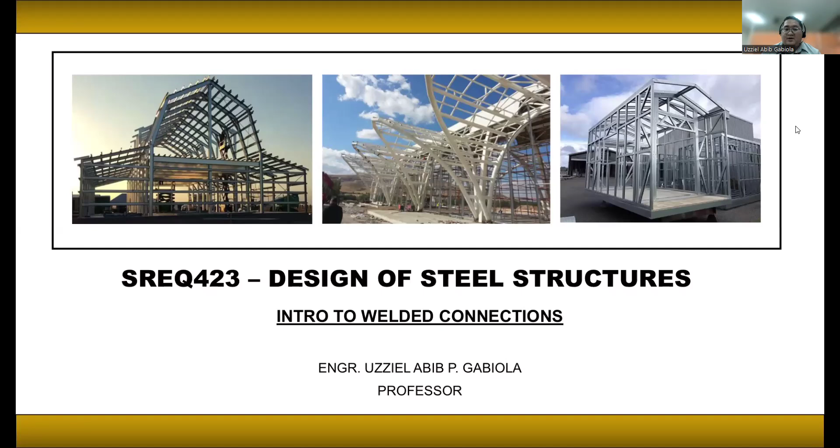So to start, let us define what we call welding. I hope everyone is already familiar with what welding is. When we talk about welding, it is a fabrication process whose goal is to join materials, specifically our structural steel sections that are made up of metals, by causing fusion. Welding of a structural steel section allows the creation of a strong and durable structure.

Sometimes we have sections that cannot be fabricated or are not available in standard shapes, or we want to stiffen a beam. We want to put cross bracings along its length so that, for example, its lateral torsional buckling can be controlled or reduced. So we try to stiffen those elements by introducing plates into our section, and one way of connecting these plates to the beam is through welding.

Structural steel sections are commonly welded together to form beams, for example built-up sections, columns, trusses, and other load-bearing elements in buildings, bridges, and various infrastructure projects.

In general, when we talk about structural applications, there are 4 welding methods that we need to understand. But for our case, there's really only one that is mostly used for analysis, which is the first one, shielded metal arc welding (SMAW). We also have gas metal arc welding (GMAW), flux cored arc welding (FCAW), and submerged arc welding (SAW).

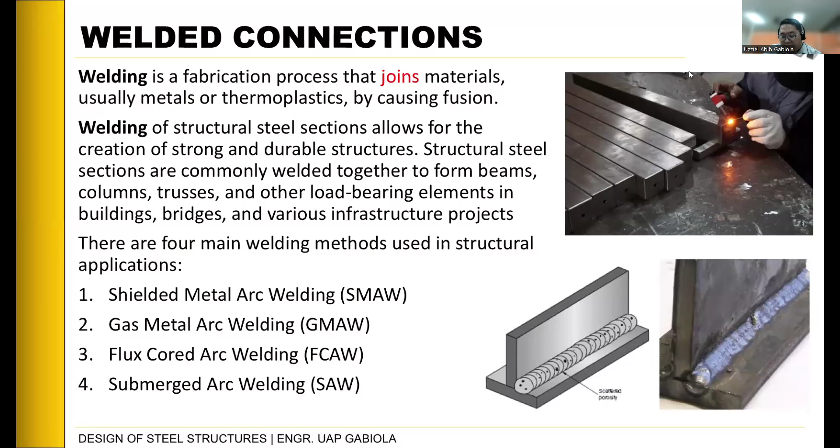So let us differentiate these 4 welding methods. First, we have shielded metal arc welding. This is the most common type of welding we see even in small or residential projects. That's why shielded metal arc welding, SMAW, is sometimes called stick welding.

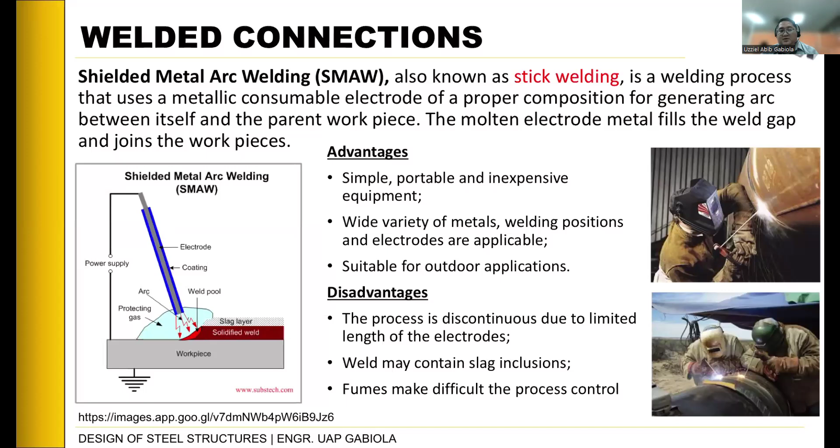Then next we have yung tinatawag nating gas metal arc welding or yung GMAW, o minsan tinatawag na MIG welding o metal inert gas welding. So for this type of welding process, may arc welding process tayo in which yung weld is shielded by an external gas. Yung external gas na yun may be argon, helium, carbon dioxide, or a combination of argon and oxygen, or other gas mixture.

So papansin niyo meron siyang, hindi siya nakastick, meron na siyang nozzle na kasama, and then dinadirect mo yung application ng electrode mo dun sa gusto mong i-connect na material. So halimbawa, dito sa portion na to, ito yung wineweld niyang part. So directed niyang ilalagay yung portion na may nozzle, yung may copper nozzle, dun sa kung saan niya gusto ipadaanin yung mismong electrode wire na nandun sa loob ng nozzle natin.

Okay, so meron siyang continuous wire, kaya mahaba yung nito, yung supply. So unlike sa stick welding, mas continuous yung welding natin. Kasi dun sa welding gun natin, may continuous wire being fed to it, and then yung molten metal is protected from the atmosphere by the gas na na-form.

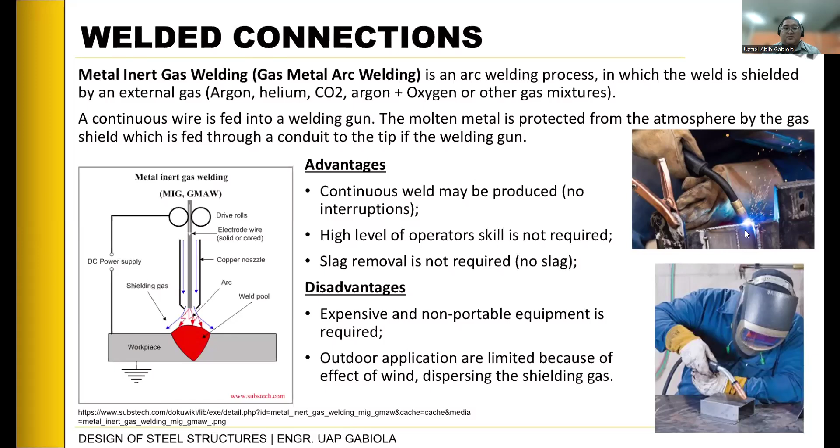It's very prone to having the gas disperse once it's exposed to wind. That's one of the challenges when using Metal Inert Gas welding or GMAW.

Next, the third one is Flux Cored Arc Welding, or FCAW. It's similar to GMAW, having a continuous wire fed into the welding gun. The difference is that the filler wire has a core.

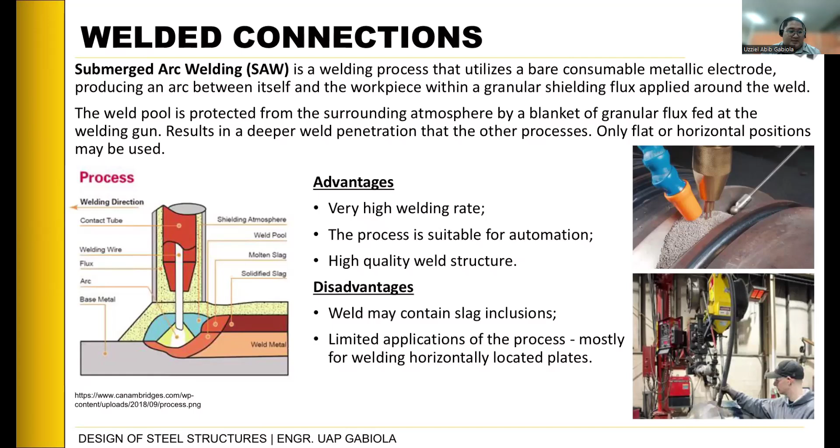Next, after these processes, we also have different types of welding. Earlier we covered methods of welding; now, types of welding.

So in structural engineering applications, we have various types of welds used to join structural components to create a strong and durable structure. We have 4 types of welds. I'm sure there are other types, but these are the most common ones used.

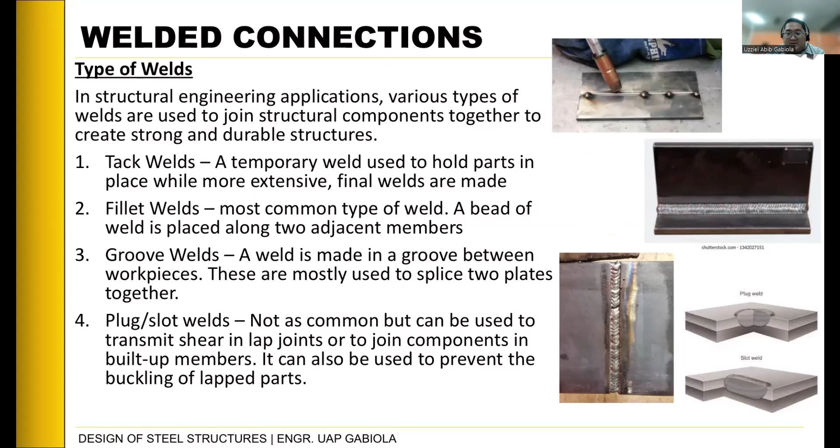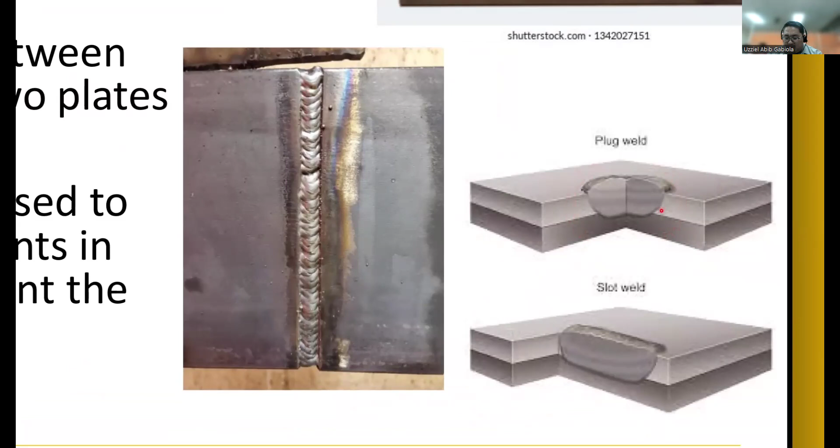Then we have plug or slot welds. These aren't very common, but can be used to transmit shear in lap joints. For example, if we intend to increase the thickness of a plate, what can be done is a plug weld or slot weld. So it's not commonly used - I couldn't even find much example application of plug and slot welds. But again, for our case, tack welds or fillet welds are what we'll use.

After that, we have the different welding joints, or welded joints. When we say joints, it refers to the location where two or more pieces of metal are joined together. There are different types of welded joints used depending on the configuration.

Let's discuss them one by one. The first one is the butt joint. With a butt joint, we have two pieces of metal, we align them, and weld them together along their adjoining edges. For example, we have two plates - these are the edges of our plates. When we weld them, we join the edges together. When you put the two edges together and then apply weld, that is a butt joint.

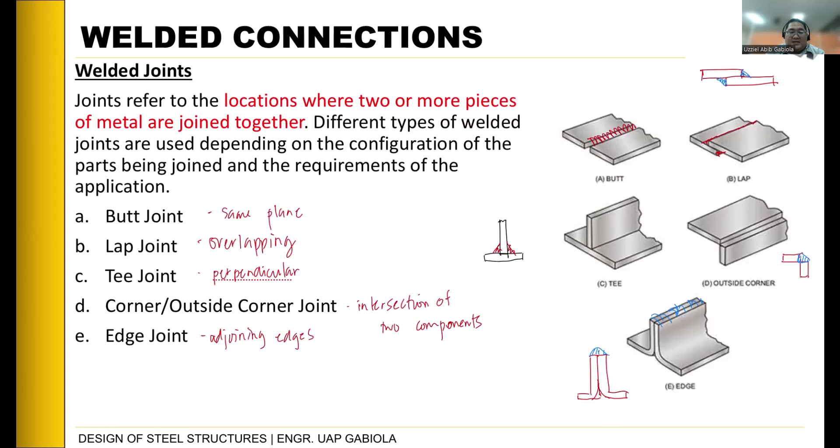For fillet welds, the symbol is a triangular shape. Every time we have a weld, we point to it with an arrow. So we point to that weld and then we put in the specification - whatever the properties of our weld are.

So kapag may nakita tayong triangle doon sa arrow line natin, ibig sabihin fillet welds yung ating ginagamit. Katulad nito, halimbawa may welding tayo dito, tinuro natin yung welding, naglagay tayo ng triangular dito.

Ibig sabihin fillet welds itong in-apply niya dito, welding type. Ano ibig sabihin kapag nasa ilalim o nasa taas yung mismong triangle natin? Kapag nasa ilalim yung triangle, ibig sabihin nandun sa arrow side yung mismong weld natin. Kung saan nakaturo yung arrow, nandun yung welding. Titingnan niyo, dito nakaturo yung arrow pero yung triangle niya nandun sa kabila. Ibig sabihin other side yung may welding, kaya ito yung may welding na side sa kanya.

Kung halimbawa both side ng workpiece natin ay may welding, ang gagawin natin, yung baba at yung taas, lalagyan mo ng triangle para i-indicate na both side, yung this side na may arrow and then the other side of the arrow, meron siyang parehas na welding. So ganun lang kasimple yung symbol natin for fillet welds.

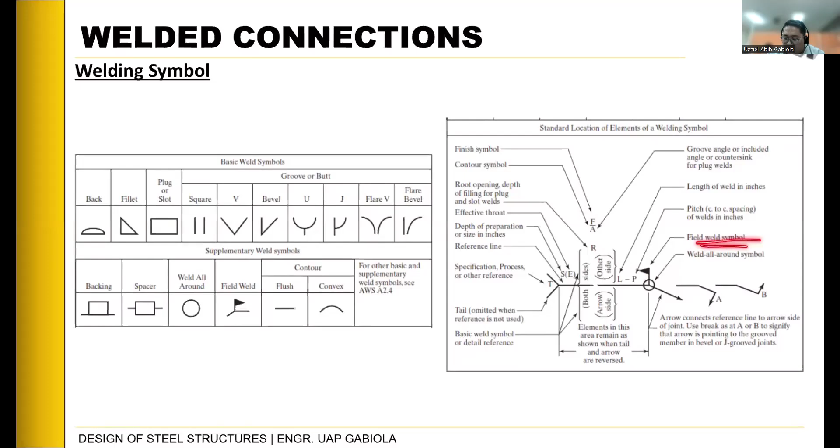Yung mismong ano to, 1/4 inch fillet weld on both sides and 6 inches long, as well same on both sides - not necessary but permissible to give sizes on both sides of line. The flag indicates kailangan na field weld dapat siya, dapat on-site siya gagawin yung welding na yan.

Halimbawa ito, staggered intermittent 3/8 inch fillet weld, 2 inches long, both sides. Parang katulad nitong nandito, nilagay lang niya na both side. Tapos kapag halimbawa may bilog yung arrow natin, it means all around ng joint symbol. Lalagyan natin - kahit hindi mo nilagyan ng ganito, lagyan mo lang ng all around doon, ibig sabihin may weld ka all around.

Pag merong tail, may specific requirement o specification na ginagamit. Pero basically ito lang yung gagamitin natin for our problems: may nakaturong arrow and then may fillet welds, merong thickness, merong length. Yun lang kasi simple connections lang pinag-uusapan natin.

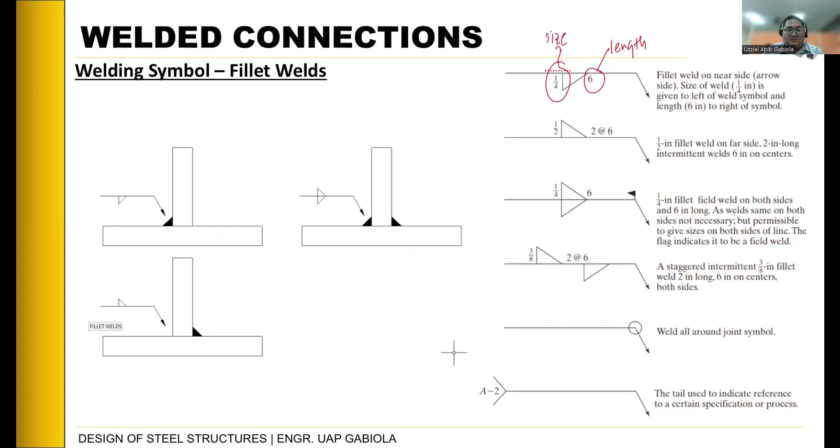And when dealing with other type of connections o yung more complicated connections, it will require a different or more extensive discussion, hindi lang yung ganitong one topic lang. Parang one course talaga siya para maintindihan.

Ngayon, since na-establish natin na fillet welds lang yung gagamitin natin, let us now determine how we will be considering yung capacity ng fillet welds na nakalagay sa atin. Yung capacity ng fillet welds is defined based doon sa tinatawag natin effective throat thickness niya ng weld natin. So ano daw yung effective throat thickness? That is the distance from the root of the weld to the face of the weld.

Halimbawa meron tayong weld, ito yung weld natin. So from the root - ang root niya yung nandun sa pinakadulo, yung sa mismong intersection ng workpieces natin. Yung distance niya papunta doon sa mismong weld natin, yun yung throat. Pero since ang kailangan natin is yung effective lang, ang ina-assume ni code is may theoretical throat tayong ginagamit. Ang ginagawa, kinukuha natin yung 45 degrees nito. Naka 45 degrees to, itong distance na to, ito yung effective throat natin na T sub E.

Kaya mapapansin niyo dito, kapag ganito naman, ito convex yung type ng weld natin - convex o palubo. Ito yung concave. And then this letter C is parang kaparehas lang ng convex. Tama ba? Concave, convex, baliktad, parang baliktad.

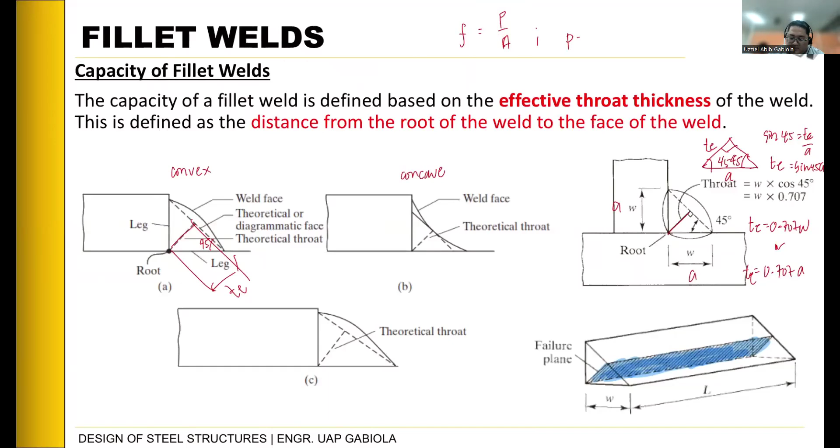So if that's our area, this becomes the base of our resistance according to the code. This is our P in our formula from before. So what is our P? Of course, our P will be equal to F times our A. So what is F times area?

According to the code, the AISC: the design strength and allowable strength of welded joints shall be the lower value of the base material strength determined according to the limit state of tensile rupture or shear rupture, and weld metal strength determined according to the limit state of rupture as follows.

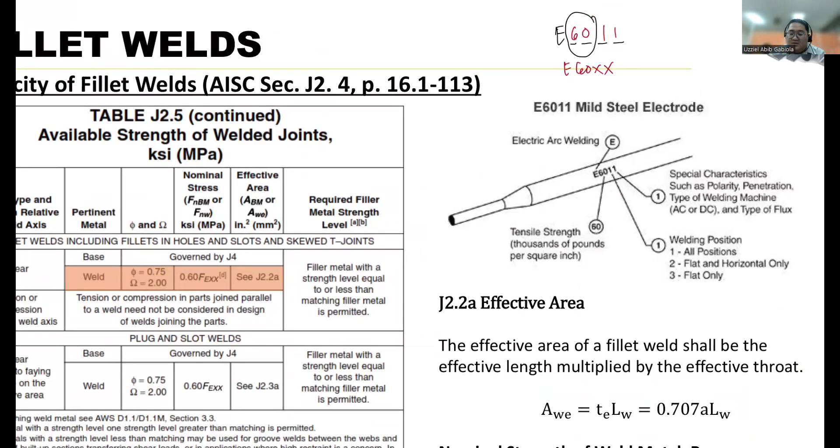Itong condition na ito is for the mechanical part, dun sa mga welders na talagang checking. Hindi na natin kailangan yun. Ang kailangan lang natin is to determine yung strength. Pwede siyang maging 60, 70, 80, 90, and so on and so forth. So kaya dapat, ano yan?

Para makuha yung nominal stress, i-multiply lang natin ng 60% yung value nung stress nung mismong electrode natin. Dito, ang ating electrode ay 60 KSI. Ibig sabihin, 0.6 ng 60. Okay, or 70, 80.

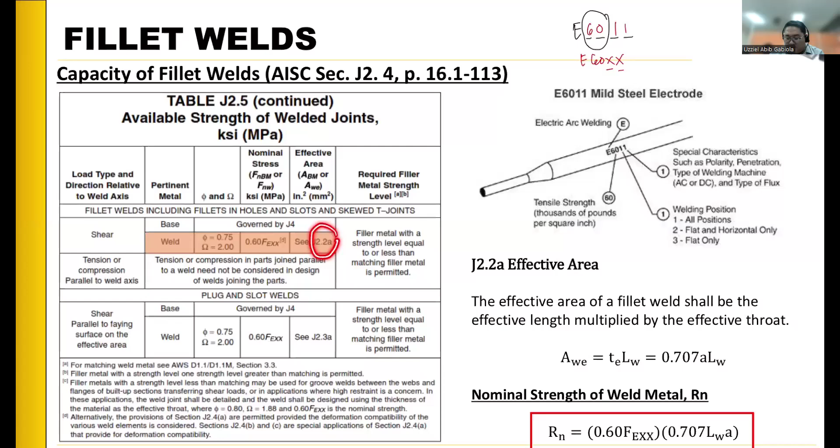Para sa effective area o yung ABM o AWE, sabi ng code J2.2A, ito na lang po nilagay ko dito. Ang sabi ng code J2.2A, the effective area ng fillet weld shall be the effective length multiplied by the effective throat. So from our previous discussion, na-determine natin na ang effective throat, ang thickness natin, ay 0.707A, at saka yung length ng weld natin.

Yun ang magiging area ng weld natin. Para makuha yung resistance ng weld metal natin, that is yung Fnw times yung area natin. Ito yung mismong value natin for Rn pag kinalculate natin. That is for the weld metal. Again, we need to satisfy weld metal tsaka base metal. Ito pa lang po yung nakukuha natin, yung sa weld metal pa lang. Ito yung formula niya. Next is yung sa base metal naman tayo.

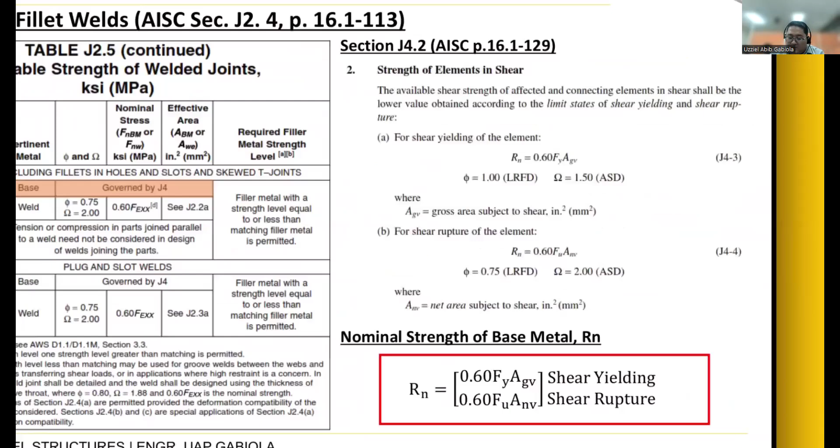Pag tiningnan yung J2.5, yung sa base metal niya, governed siya by Section J4 ng AISC. Sabi ng Section J4 ng AISC, ito po yun. Kinuha ko na lang yung element in shear kasi, as I've said, for fillet welds, shear yung mag-govern sa ating loading. The available shear strength of affected connecting elements in shear shall be the lower value obtained according to the limits of shear yielding or shear rupture. Yung formula niya, 0.6 FY AGV para sa yielding, and 0.6 FU ANV. Makikita dito nagbabago yung factor niya kung yielding and rupture yung ating kinakalculate. Kaya hindi natin pwedeng pagsamahin siya as one.

Dito, yung value ng Agv at Anv, iba, sabi natin, kapag welding naman, since wala naman tayong binubutas na plate o hindi natin kailangan magbutas, yung net area natin will be equivalent dun sa mismong gross area natin. Dito, magbabago lang talaga yung factors. Dapat alamin lang natin na pag yielding tayo, 1 and 1.5. Kapag rupture, that is 0.75 and 2. At yun ang magiging strength ng base metal natin.

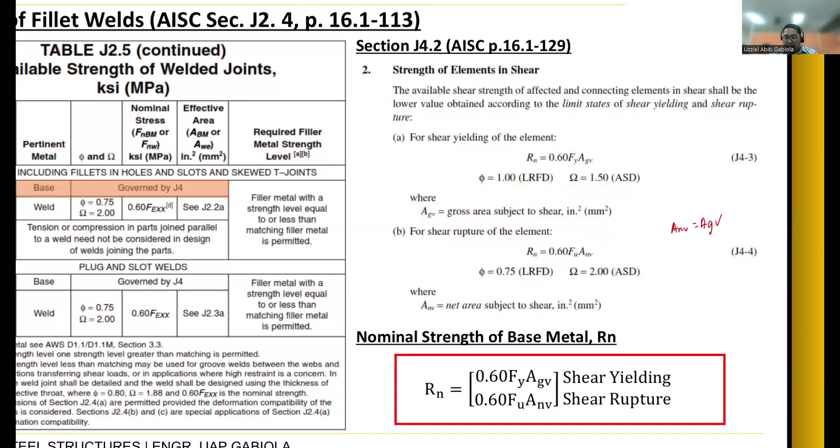Kapag meron na tayong strength ng base metal, i-compare it with the strength of the weld metal, and then look for the lowest value, that will be the capacity of our weld connection. Yun na agad yung weld connection natin. Yun na agad yung analysis. After non, na-identify mo na yung capacity ng weld connection mo.

Kung meron na tayong capacity, katulad nung sa bolt connection, kailangan din natin i-check kung na-satisfy na natin yung mga limitations ng weld natin. Meron siyang mga minimum and maximum sizes, so madali lang din siyang i-check. For the minimum weld sizes, titingnan natin siya sa table. Kailangan ma-check yung minimum weld size para daw maiwasan yung heat sink effect.

Kasi kapag nagwe-weld tayo, may heat tayong tina-transfer dun sa mismong workpieces natin. At kapag yung weld ay too small, yung plate will absorb the heat too rapidly, mabilis niyang i-absorb, na nagre-resulta sa cooling ng weld. Ibig sabihin, tumitigas agad siya kahit hindi pa natin na-form yung required na thickness para dun sa welding natin.

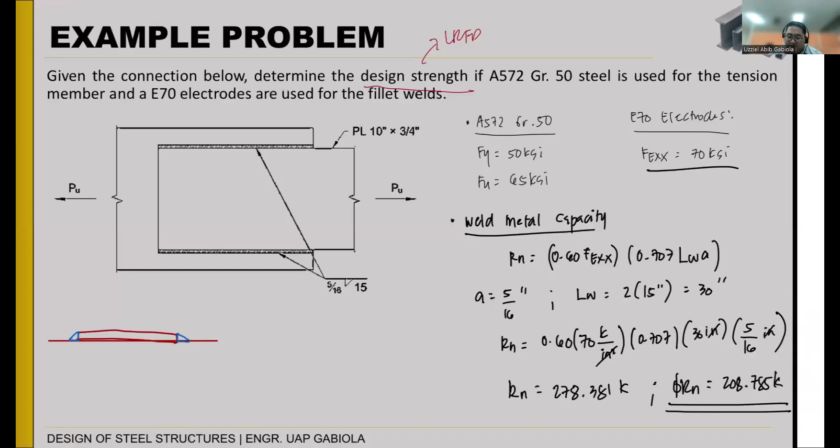Base metal capacity. For base metal capacity, meron tayong dalawa na kino-consider, yung ating shear yielding and shear rupture. Okay, for shear yielding,

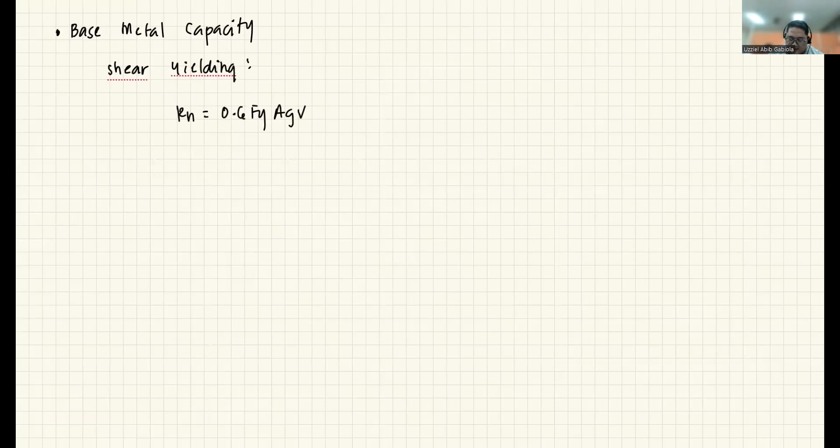Kailangan natin, Rn is equals to 0.6 Fy AGV. Okay, so ano yung AGV natin? Ano ba yung kino-consider natin na kapag yung base metal natin, alin ba yung thickness na exposed dun sa welding natin. So syempre, dito sa diagram natin, ito 'yon, and ito yung thickness na 'yan. Itong portion na to, pag sinide view natin, ito yung thickness na 'yan, and that is how much?

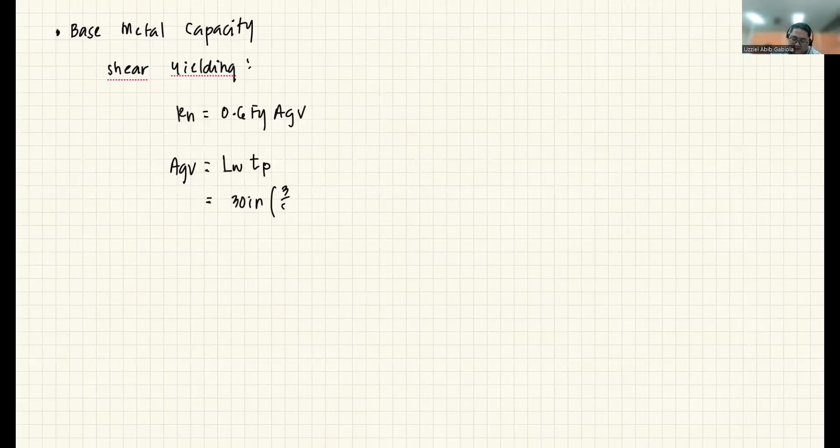That is 3/4 times yung length ng weld natin. So, AGV will be equals to length ng weld times yung thickness ng plate natin. So, that is equals to 30 inches, and according dito, that is 3/4 inch. So, ang AGV natin will be equals to 30 times 0.75, that is 22.5 inches squared.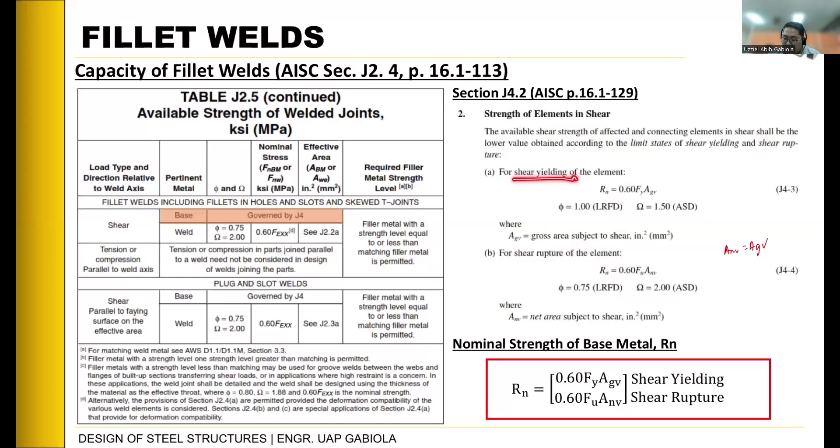That is AGV. So, ang Rn natin will be equals to 0.6. Ang Fy natin will be 50 kasi yung material ang pinag-uusapan natin, times 22.5 inches squared. So, Rn natin is 0.6 times 50 times 22.5. That is 675 kips. And for shear yielding, ang phi natin is 1.0 for LRFD. Ibig sabihin, that will be the same value na 675 kips. That is for shear yielding.

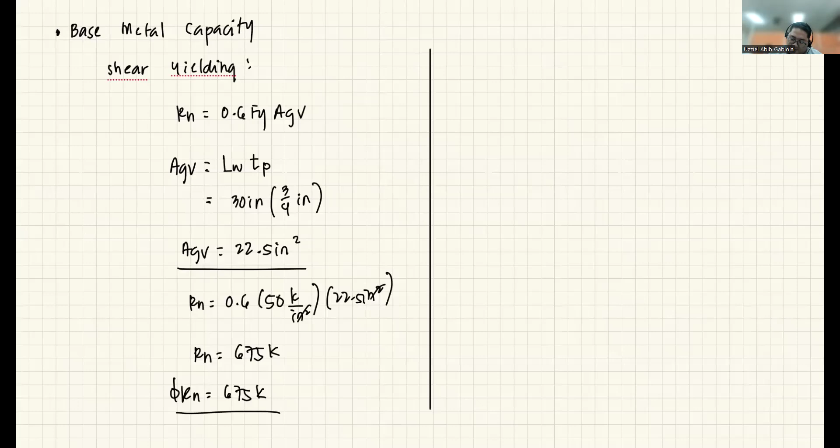For shear rupture, the formula is Rn equals 0.6 Fu Anv. Pero again, as mentioned, for welding, Anv is equals sa AGV. So this is 0.6 times 65 kip per inches squared times 22.5 inches squared.

Cancel natin yung inches squared. So Rn, 0.6 times 65 times 22.5, that is 877.5 kips. So ang phi Rn natin, this is for rupture, so 0.75 times 877.5 kips, phi Rn is equals to 658.125 kips. Okay, so comparing all yung capacity na kuha natin, so ito yung para sa shear rupture ng base

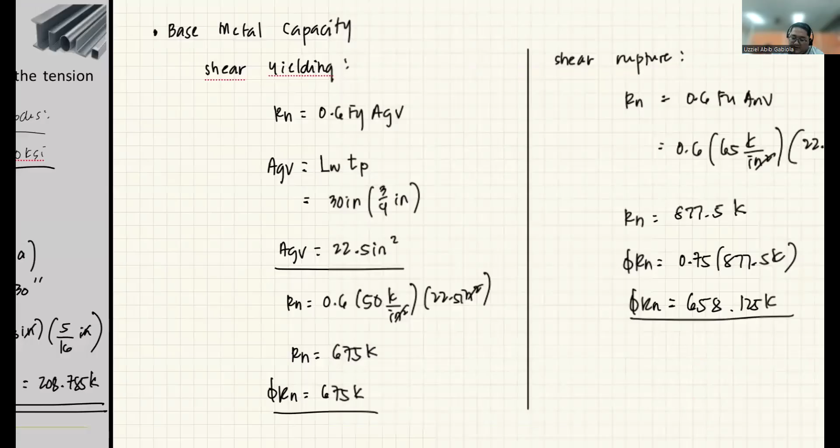metal, shear yielding ng base metal, and this is for our weld metal capacity. Ang governing natin na phi Rn is of course yung lowest, which is 208.785 kips. This will be our capacity ng welded connection natin, kasi yung pinakamababang value na na-calculate natin na Rn based sa weld capacity and sa base metal capacity.

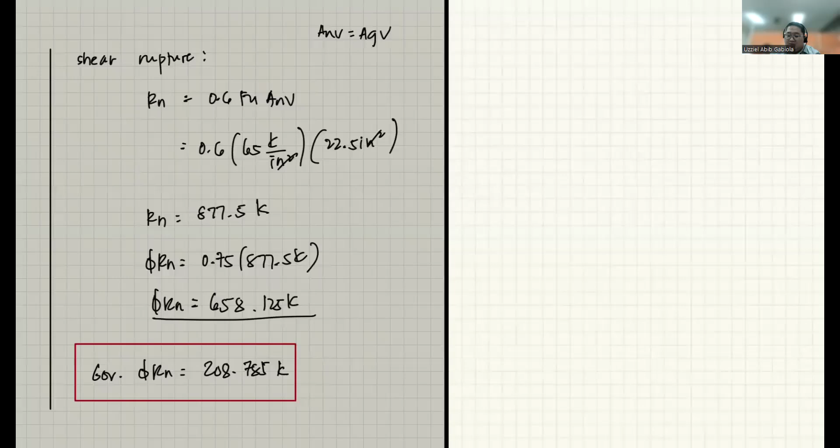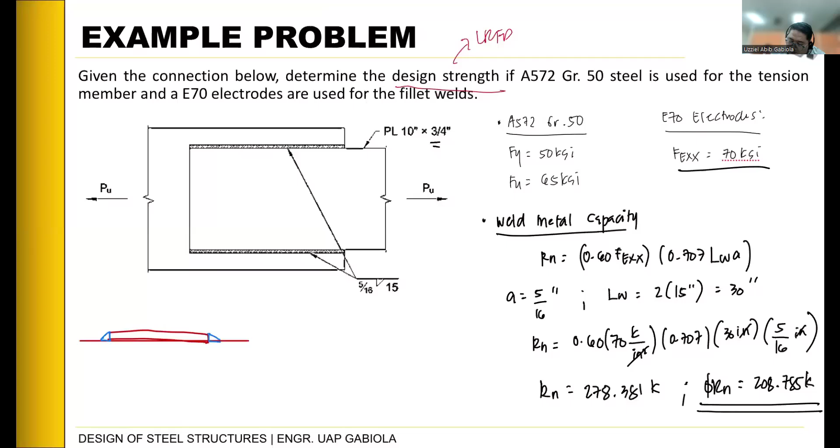Okay, next is to check whether we satisfy yung limitation natin for weld sizes. Kunin natin ngayon yung A minimum tsaka yung A maximum natin. So, for A minimum, kailangan natin i-compare yung A natin na actual. Yung A actual natin based from our calculation earlier, ang A natin ay yung 5/16 inches, and yung thickness ng plate natin, that is 3/4 inch.

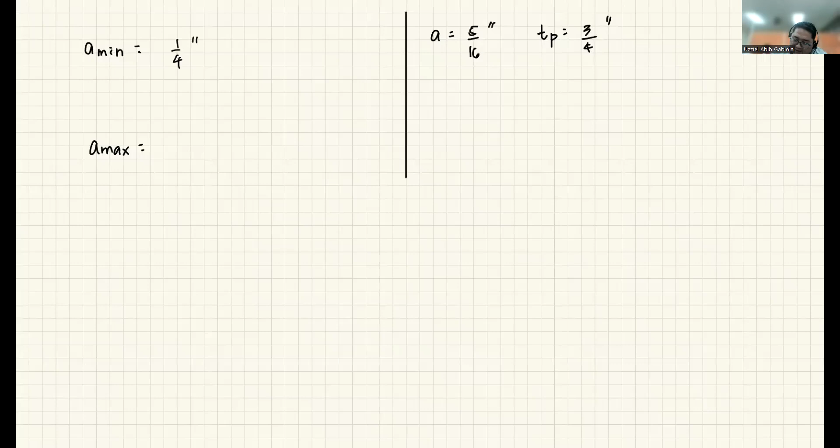Okay, so according dun sa table, let's look at the table. So, kung ano man yung material thickness natin is 3/4, so over 1/2 to 3/4, ito yon. Ang A minimum daw niya dapat ay 1/4. So, ang ginamit natin ay 5/16, 5/16 is greater than 1/4, so therefore, okay tayo doon sa A minimum. So, dito dapat ay 1/4 inch requirement natin. This is according to table J2.4.

Then for A maximum, we have two values. So we have t, or t minus 1 over 16. That is kapag yung tp natin is less than ng 1/4 inch, or yung tp natin is equal or greater than sa 1/4 inch. So since yung tp natin is 3/4, so greater than siya ng 1/4, so ito yung magiging formula natin. So t minus 1 over 16, that is 3/4 minus 1 over 16, so that is 11 over 16. A max natin.

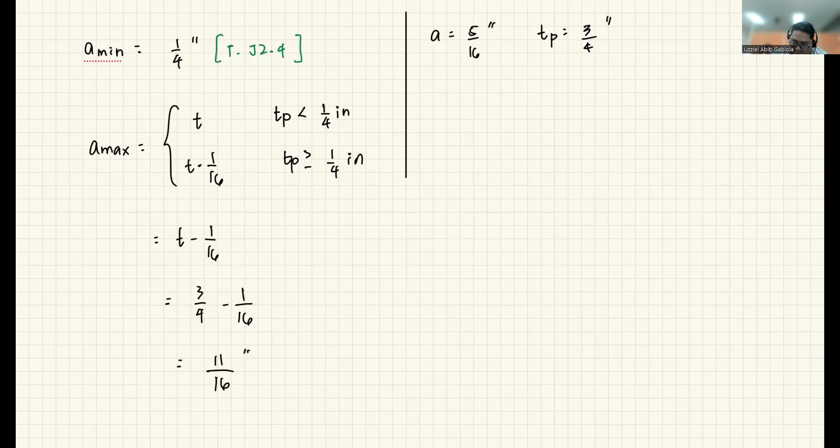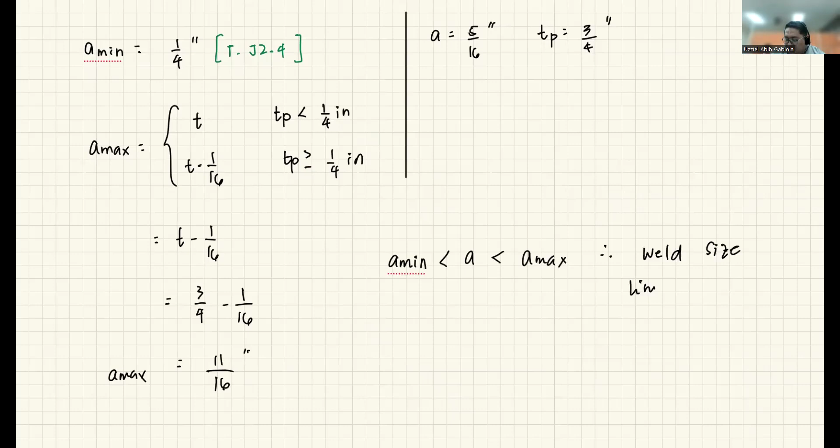Okay, so since yung A min natin is less than dun sa actual A natin, less than dun sa A maximum natin, therefore, the weld size limitation is satisfied, kasi nasa in between tayo ng value ng A minimum and A maximum for our weld.

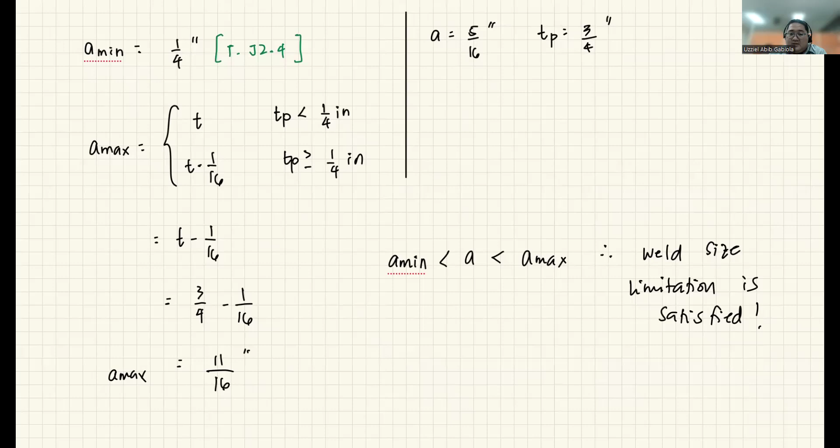Okay, so that is for the capacity of the welded connection. So to practice yung learning natin with this lecture, I will be uploading a problem set with regards dun sa calculation ng welded connection analysis, so I will be uploading this sa Neo. Okay, so two questions lang, determining what is being asked, and then you have this particular type of connections, or syempre fillet welds lang din yan. Then using the principles discussed dun sa lecture natin.

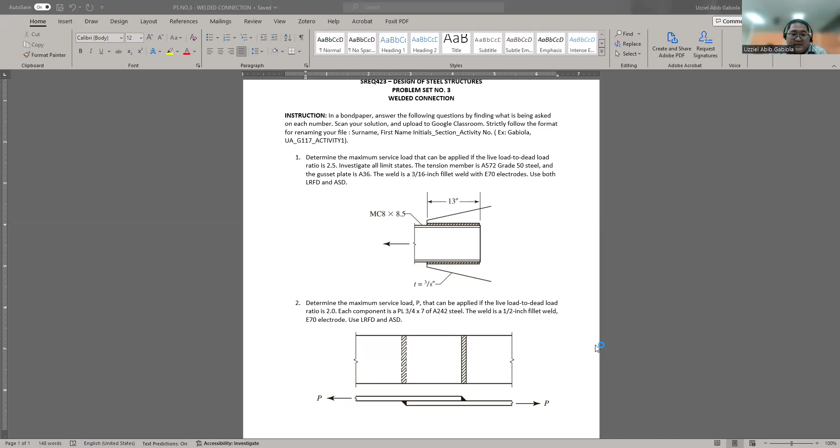Okay? So, kung no more question, tama ba? Wala bang question? Ay, kung no question, that ends our lecture for today. Okay, so today is just yung analysis natin. When po exam? Okay, wait lang. Okay, so this ends our lecture, no?